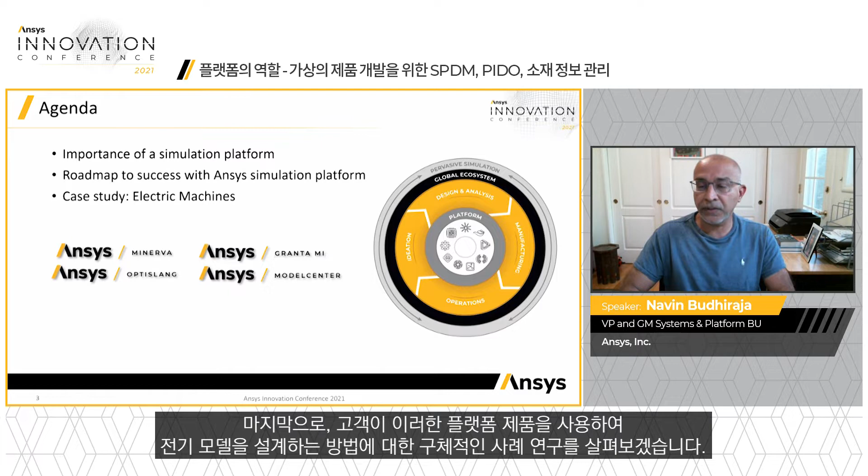I'd like to show you how these products are key to your simulation-led digital transformation and digital thread initiatives, including a simple roadmap on how you can adopt these products as part of your existing product lifecycle and tools. Finally, to make this concrete, I will discuss a case study from one of our customers on how they are using these platform products to design electric motors.

Modern products are getting increasingly complex due to the integration requirements of mechanical, electrical, electronic, and software components. At the same time, companies are under increasing pressures to introduce new products faster, lower design and manufacturing costs, and ensure their products continue to meet more stringent regulatory, environmental, and safety standards.

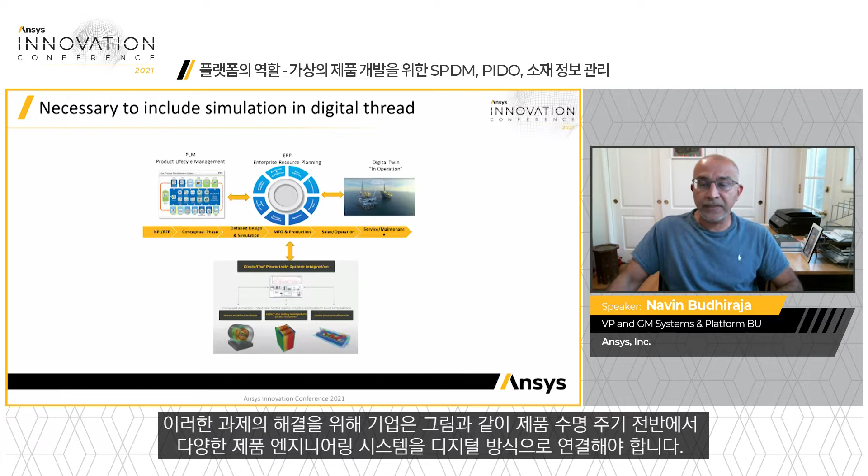To meet these challenges, companies see a critical need to digitally connect the disparate product engineering systems across the entire product lifecycle, as shown in the picture. And given the critical role simulation plays in the digital thread, customers also see the need to connect all their simulation assets, the CAE tools, the process of how these simulations are managed, and most important, the simulation data, into this overall digital thread.

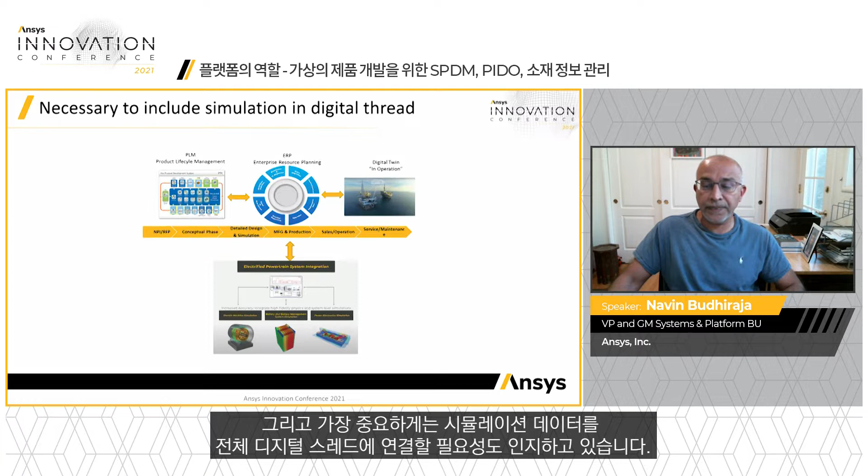However, managing this ecosystem of simulation tools, data, and processes is not easy. Since most companies have standardized on only one or two CAD systems, this allows them to manage the corresponding CAD design tools and data efficiently inside their PLM systems. But the landscape of simulation and CAE tools is significantly different and more complex, as shown in the slide.

CAE has multiple design disciplines like mechanical, electrical, optical, etc., which results in dozens of CAE tools being used from multiple different vendors. The process of how these different engineers across disciplines and departments work together is ad hoc, and the large amounts of data produced from these CAE tools is today managed using approaches like the engineer's local desktop or shared file systems. This ad hoc management of data results in poor engineer productivity due to the inability to easily reuse results from prior simulations, and collaboration challenges across functions and departments that are using different tools.

Furthermore, lack of traceability to the PLM and CAD can result in significant delays. For example, a customer lost three months of engineering time working on old CAD models because the PLM and CAE systems were disconnected.

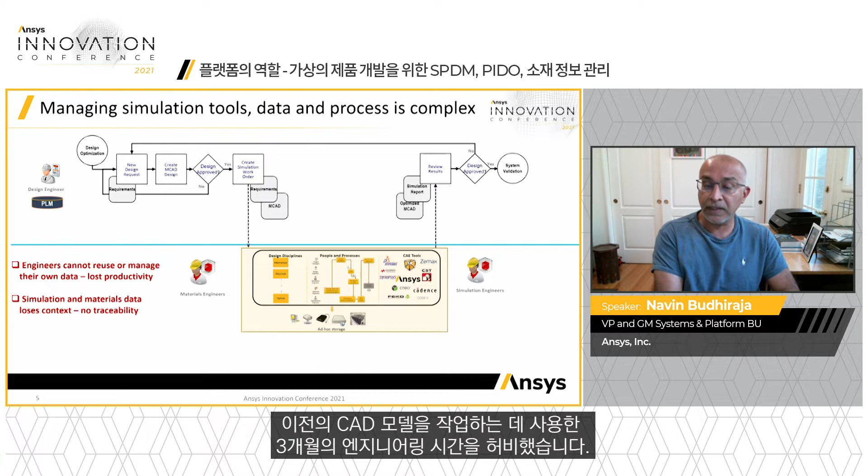Hopefully, you see the need of a connected digital thread. But there is still this debate, mainly from our competition, that all simulation assets should be managed inside a PLM system. However, as you can see from this recent Aberdeen Group study, the best-in-class companies consider simulation to be very critical, but a separate discipline that needs to seamlessly interoperate with your PLM and other engineering tools.

In particular, according to this study, 60% of the best-in-class companies saw increased value when they maintained this independence between PLM and simulation.

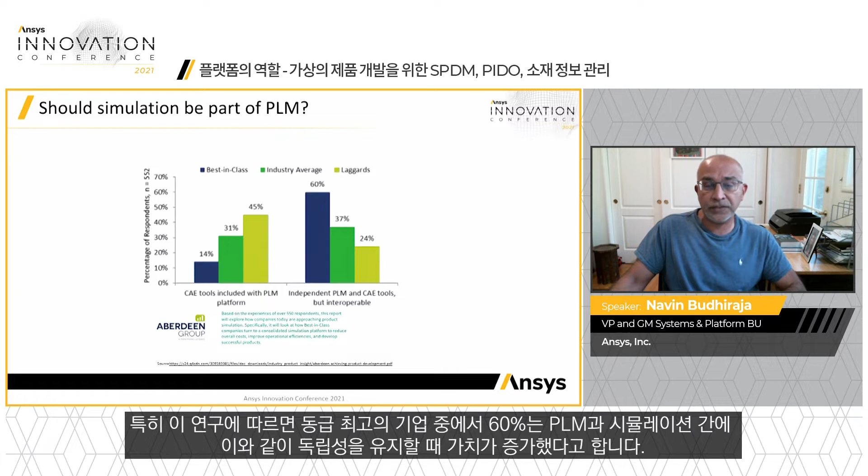So what is the best way to integrate all your simulation tools, data, and processes into the overall digital thread? We believe that a best-in-class simulation platform is the answer. This platform will be the authoritative source of truth for simulation, but still be completely open and interoperable to seamlessly connect into the overall engineering digital thread with your PLM and ERP systems.

Furthermore, based on our experience working with customers, we believe that material data and processes should be managed inside a material information management system, or MIM, and core CAE tools, data and processes should be managed inside an independent simulation process and data management, or SPDM system. Again, fully interoperable both with each other and with the overall digital thread, that includes other engineering tools like PLM, ERP, etc.

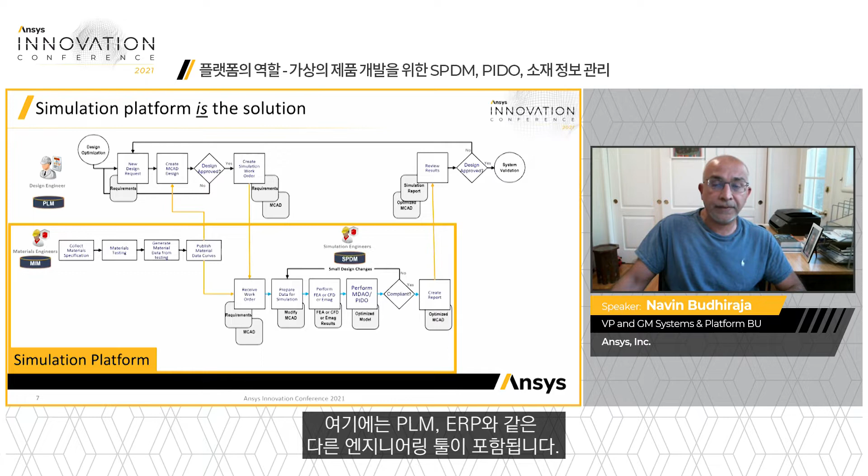The same Aberdeen Group study that I referred to earlier further states that adoption of such a simulation platform can significantly improve time to market and total cost of ownership versus companies that are not yet using such a platform.

Given this critical need, we at Ansys have been working hard to bring this simulation platform to our customers. And given our decades-long expertise working with our users, where we deeply understand their use cases, we believe we are the only ones to offer a true and comprehensive platform in the market today.

I now want to spend the rest of the talk presenting these platform offerings, and in particular show you a roadmap of how you can adopt this as part of your digital transformation initiatives.

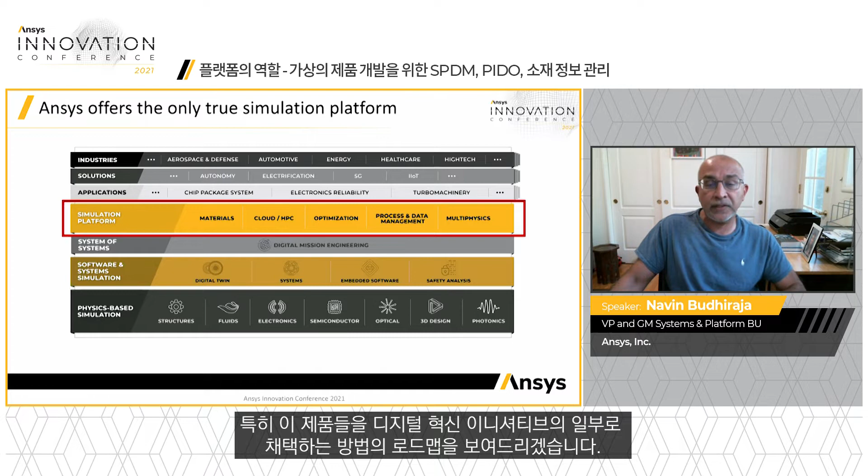Before I introduce the roadmap, I want to clarify that this is just one possible adoption journey. Different customers can choose a different sequence from what I am presenting due to the openness and flexibility of our offering, even choosing a subset of these offerings depending on their needs.

The journey consists of four steps. The first step is to get control of your simulation IP or data. That includes both your material data as well as the results from your simulation. This will provide you the necessary mechanisms to enable capabilities like search, versioning, reporting, traceability, and reuse.

The next step is to capture your critical CAE processes to document your cross-domain workflows. This will ensure repeatability and standardization. Every organization today has an urgent need to do this to address the challenges of scale and potential loss of expertise due to an aging and retiring workforce.

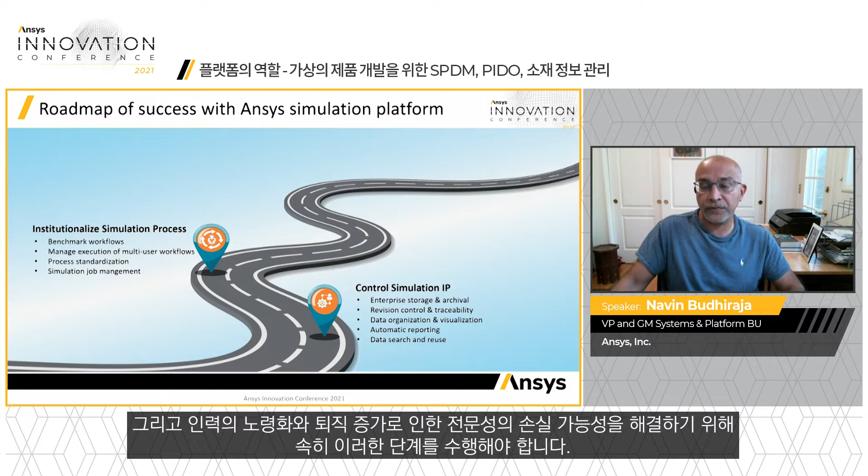Once you have a way to capture your data and business workflows, you can further automate the interactions and data movements between the dozens of CAE tools that need to execute these workflows and run these executions automatically on HPC systems, both on-premises and in the cloud.

An important outcome of this automation and HPC execution is the ability to run several parametric studies on your product design so that you can not only verify the correctness, but also design the best products.

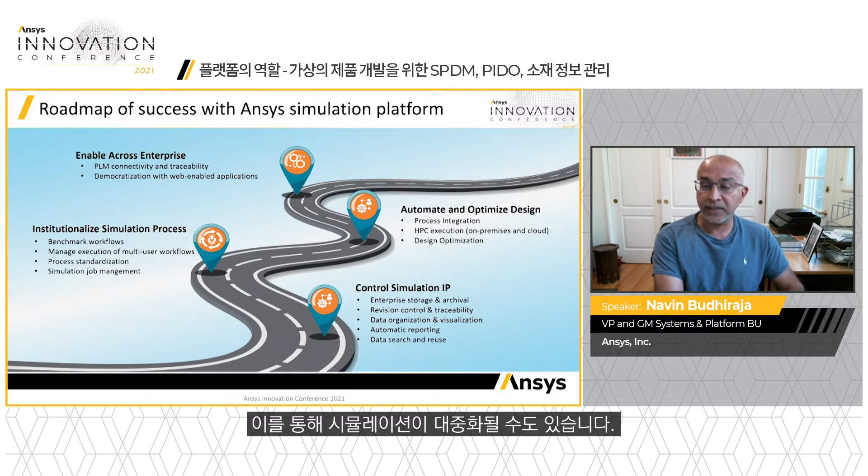And finally, scale this across the enterprise by connecting your CAE tools, processes, and data to the enterprise digital thread with PLM. This also supports democratization of simulation by allowing non-experts to access simulation outcomes beyond the core CAE users.

Every company today struggles to have enough expert analysts to support their increasing simulation needs, and the scaling and democratization of simulation outcomes is critical to make simulation-driven design and development a reality. I will next describe these steps in more detail.

First, in order to make simulation and material IP available as part of the digital thread, you should capture your simulation and material data. Ansys Minerva is our SPDM solution that houses all of the simulation data, captures the context of the data, allows search, versioning, and also manages the simulation workflow between team members across tools and domains.

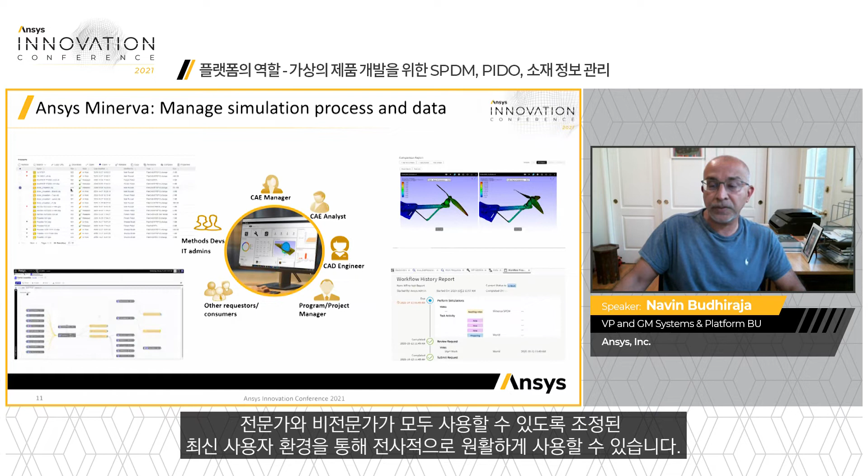Ansys Minerva is a fully web-based application, allowing seamless usage across the enterprise with a modern user experience tailored to be used by both experts and non-experts.

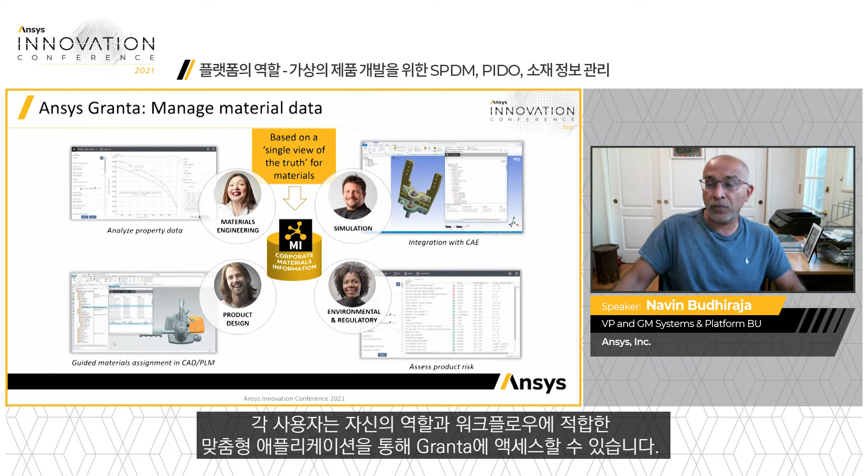The next tool is Ansys Granta, the industry-leading offering to manage materials data across the entire enterprise. Different users can access Granta via custom applications that are appropriate to their role and that fit within their workflow, whether web apps from within a web browser or even from within a third-party tool like CAD.

The key point is that all of these users are accessing quickly and efficiently a single view of the material's truth for their company. No inconsistencies, no inaccuracies, and the full history of the company's material activities is captured for reuse and traceability.

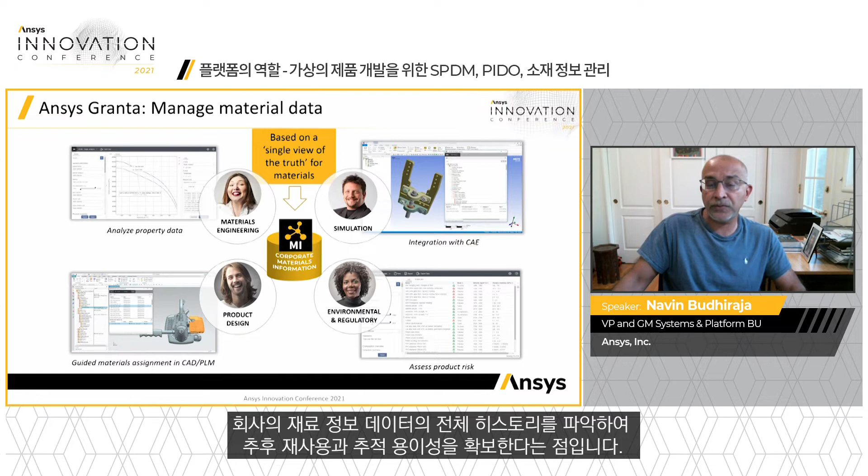So now, once the data is secured in the right system, seamlessly integrate the Minerva and Granta solutions and complete the digital thread between the two.

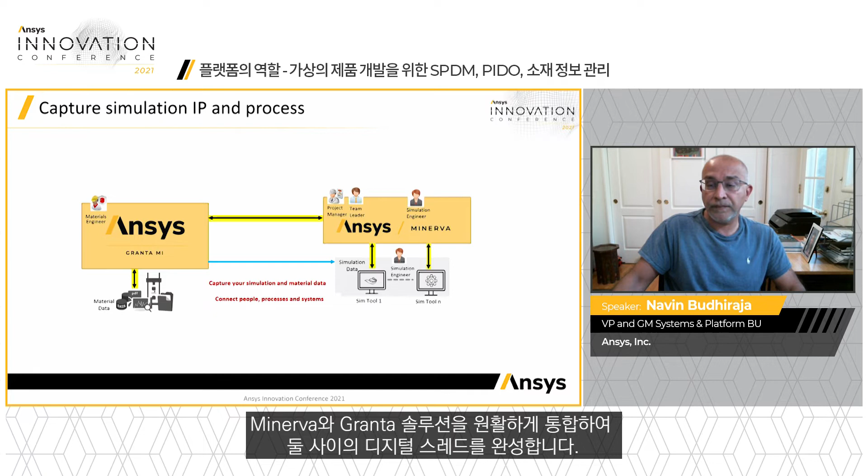Now, when a material property is changed in Granta by a materials engineer, the change is propagated to Minerva, notifying the simulation engineer about the changes. Collaboration becomes easier and product development processes become more efficient as everyone has the right data and context when needed.

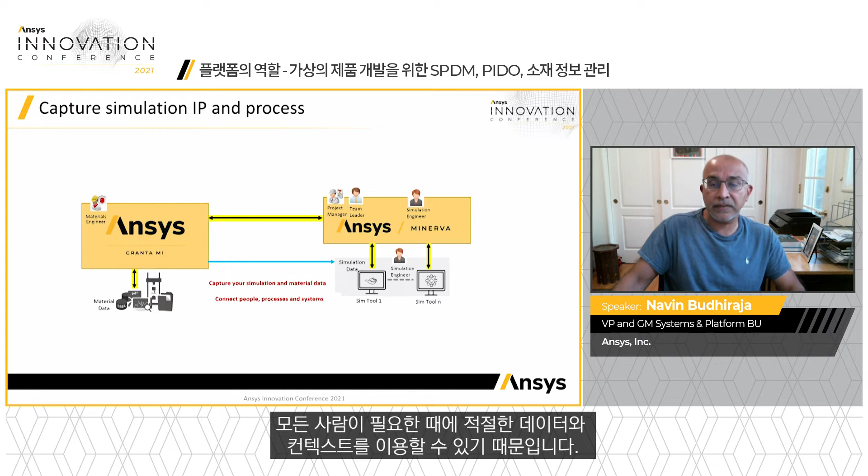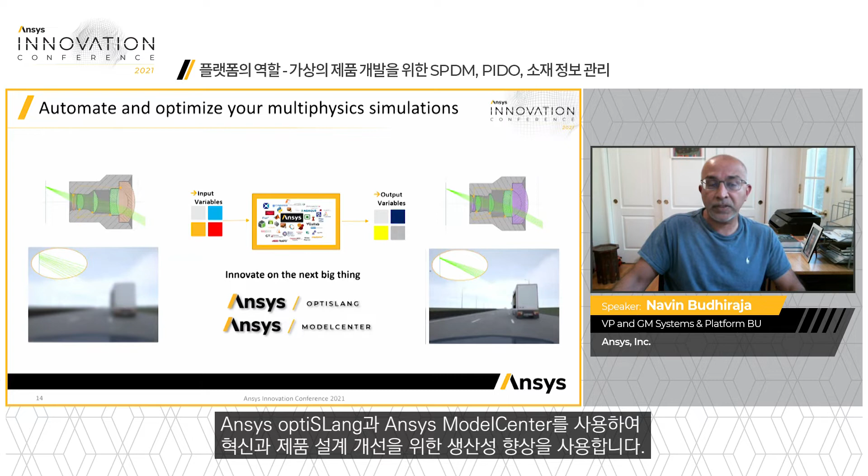Next, use the productivity enhancements that you now get towards innovation and product design improvements by using Ansys OptiSLang and Ansys ModelCenter. These tools enable optimizations and trade studies by connecting any tool to any tool, both Ansys and non-Ansys.

For example, this slide shows an example of how a customer significantly improved a wide-angle lens operation across a range of temperatures. This is a complex problem, as one has to optimize across multiple parameters, like the thickness of each lens, placement of these lenses, and changes in performance across a large operating temperature range.

As you can see, the original design produced the blurry outcome on the left. After running an automated design optimization using Ansys OptiSLang, a much improved product was created that met all the necessary safety and quality requirements.

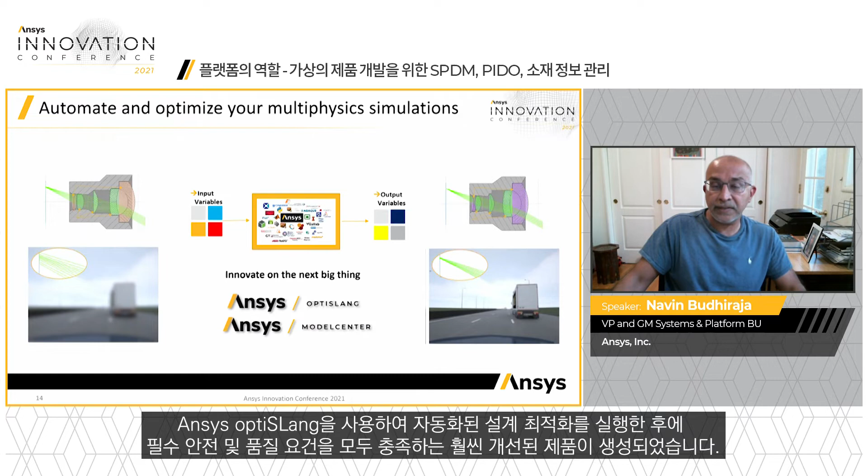So putting the full Ansys platform together and connecting the data, people, and tools results in a picture that looks like this. Again, as I mentioned earlier, each offering is unique, has its own custom experience tailored to their unique users, and can be deployed independently and in any order by a customer. But the full value is only created by connecting all of them together.

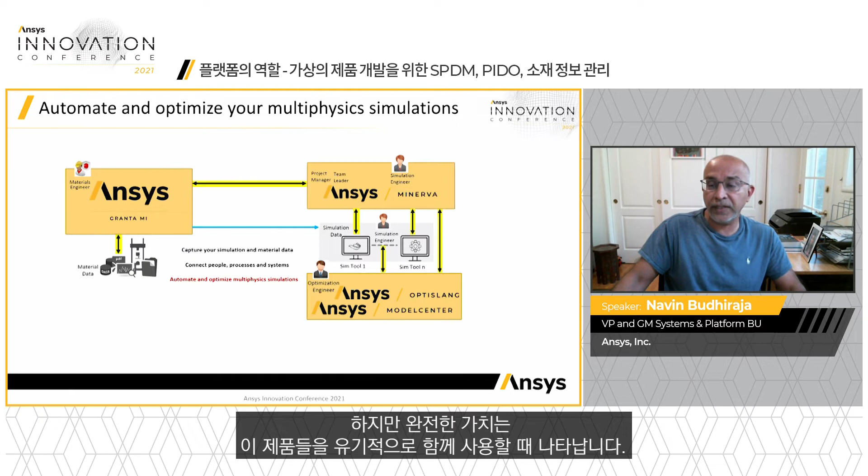And not just connecting the Ansys products to each other, but connecting these to the full product lifecycle that includes your PLM and ERP systems. Now, when a material property is changed in Granta by a materials engineer, the change is propagated not just to Minerva, as described earlier, but also to the PLM systems, notifying also the CAD engineer about the changes. This is the reason that the customer who lost 3 months of engineering time where the simulation team was working on an old CAD file started implementing the Ansys simulation platform.

However, scaling simulations to the enterprise really means enabling simulations to non-experts in the entire organization. Companies are looking for ways to enable engineers who are not simulation experts to do more simulations, and for experts to be able to provide ways to share their knowledge. Depending on the maturity of different workflows, we see different ways this can be accomplished.

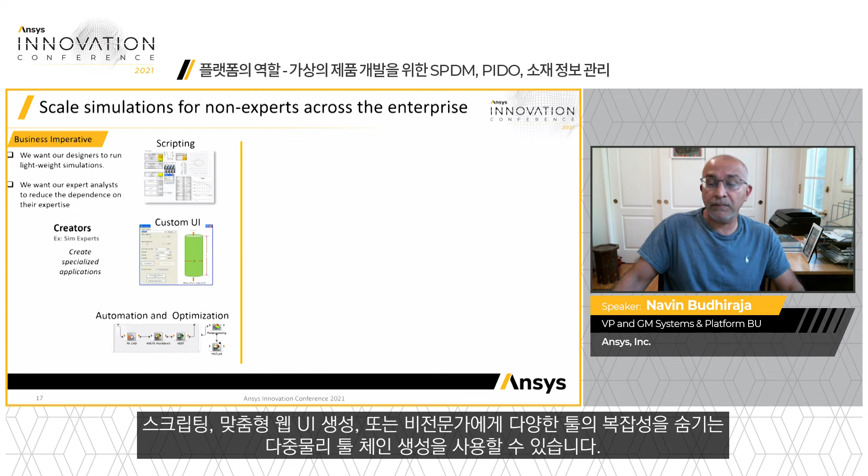Through scripting or creating custom web UIs or creating multi-physics tool chains that hide the complexities of the different tools from the non-experts. Whatever the case might be, the expert creators can publish their applications to Minerva, and then non-experts can access these simulation applications from within Minerva using simple, customized web interfaces.

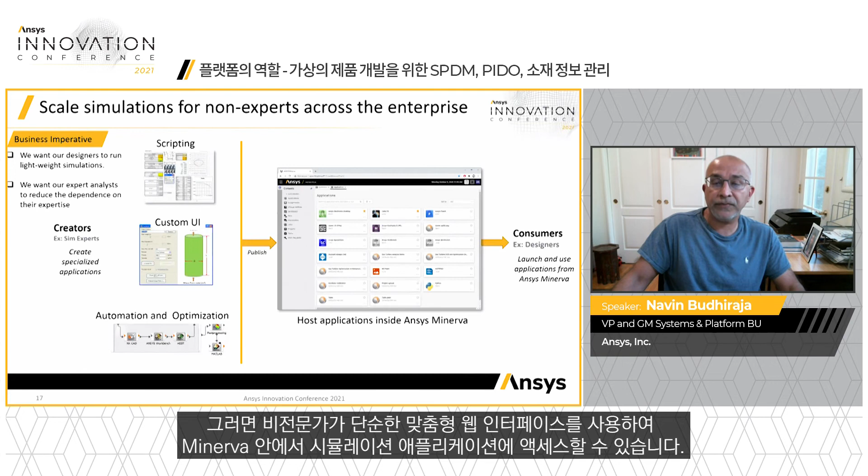This democratized access to the industry-leading Ansys multiphysics is the aspect I am most excited about in the Ansys simulation platform. I believe this will make simulation truly pervasive across the entire enterprise. Additionally, with the work that we are doing to enable REST APIs for all our products, developers outside of Ansys, both at partners and customers, can build innovative simulation-powered applications that can be used by anyone.

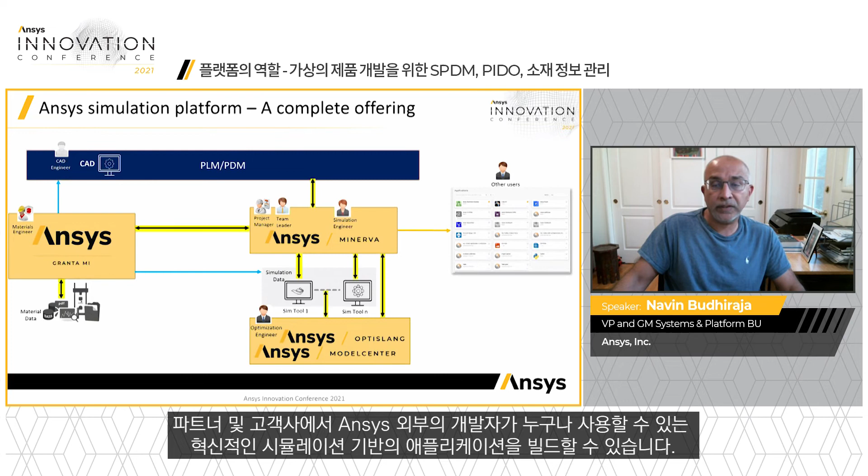Even in just the detailed design phase, there are still multiple people involved, from a motor design engineer to a thermal engineer, and also project leads carrying out various tasks in multiple CAE tools such as Motor-CAD, Ansys Maxwell, Ansys Mechanical, Ansys Fluent, etc. Data needs to be constantly exchanged between these different disciplines, and the work of the different engineers needs to be coordinated.

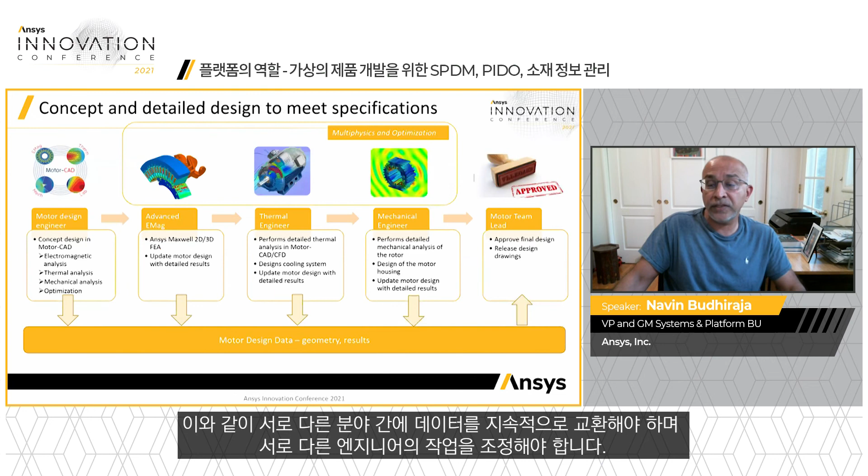These complexities in the design process become obvious when engineers start to work together. Complexities like searching for the right data, being able to reuse existing simulation data, establishing organizational best practices, and so on. All of the challenges we saw earlier around interoperability, change management, best practices, simulation and material data management, and optimization are very real for this customer and this use case.

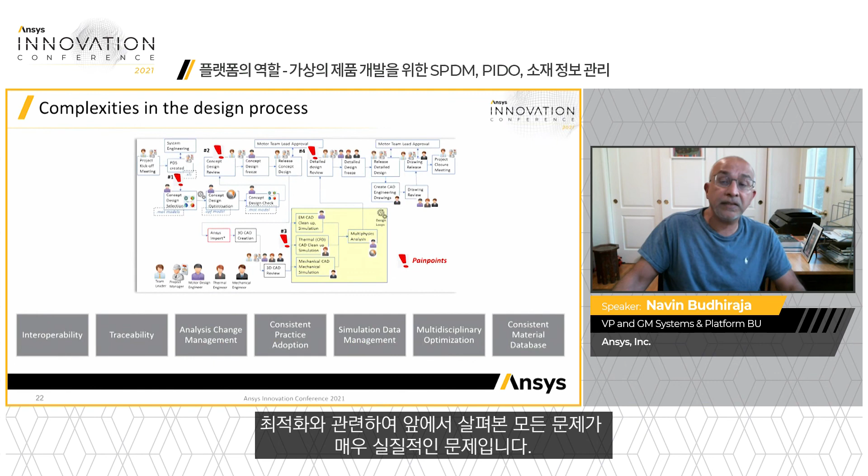But as we also saw earlier in the talk, these are exactly the challenges that can be addressed with the Ansys simulation platform. However complex your landscape is, and this electric machine use case is a very typical example of the complexities all our customers in many industries experience, by providing the engineers with the right tools, you can manage these challenges and ensure everything is connected and orchestrated.

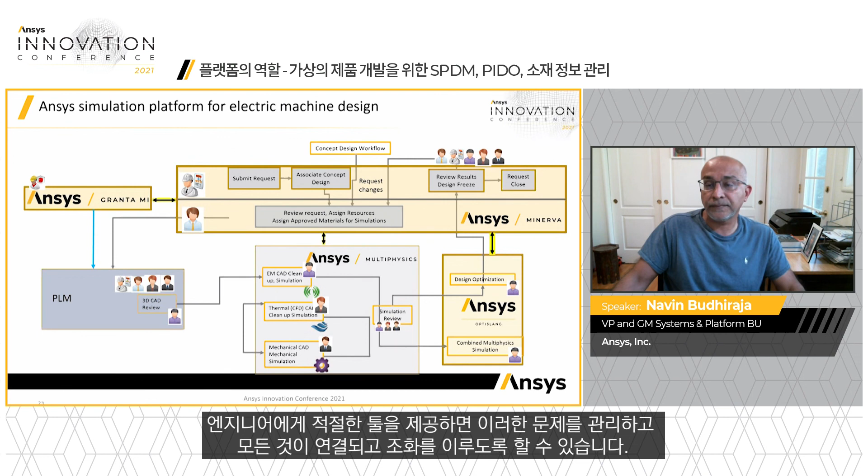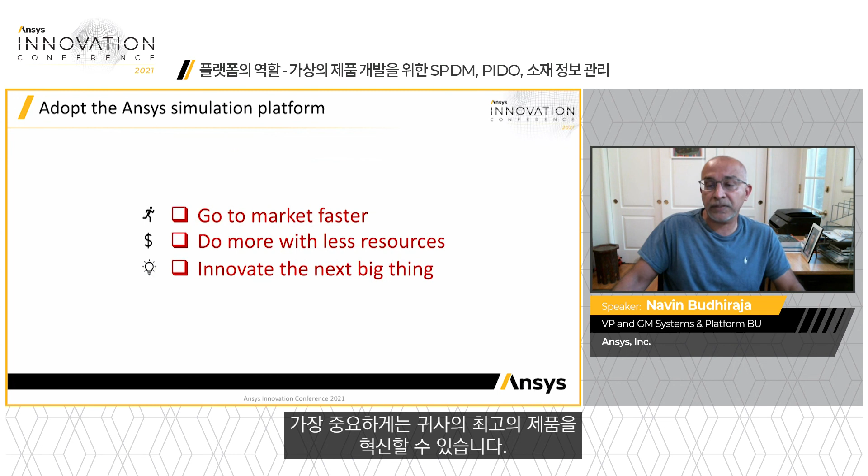In summary, I encourage you to reach out to your account team to learn more about the Ansys platform and attend the detailed product sessions at the conference to learn the deep industry-leading capabilities our products offer. Adopting these capabilities will enable you to go to market faster, do more with less resources, but most important, innovate on your best products. Thank you and enjoy the rest of the conference.